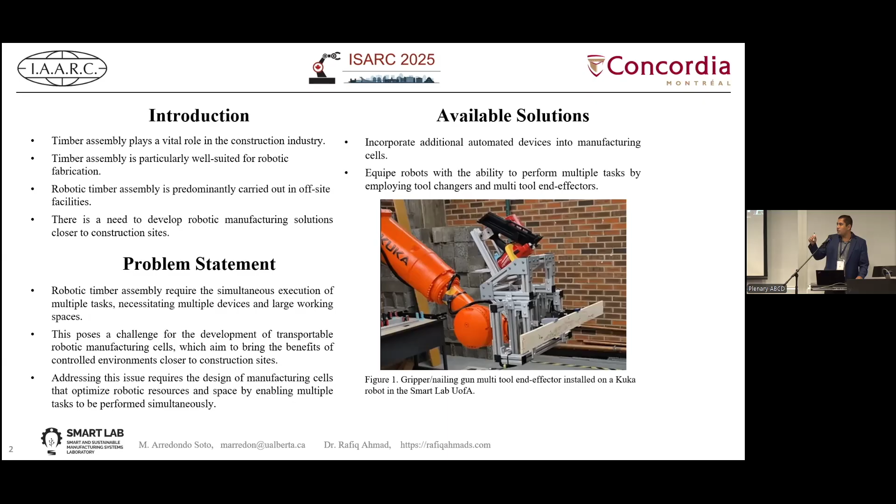Instead of using an external device, we want to make the robot able to hold and nail timber elements at the same time. So the concept of mobility-added multi-tool end-effector is introduced. This end-effector enables simultaneous execution of picking and nailing with the ability to modify nail position and orientation. It's designed using 1-degree-of-freedom closed-loop linkages driven by linear actuators, which may allow easy control integration and provide structural stability, characteristics of this type of linkage.

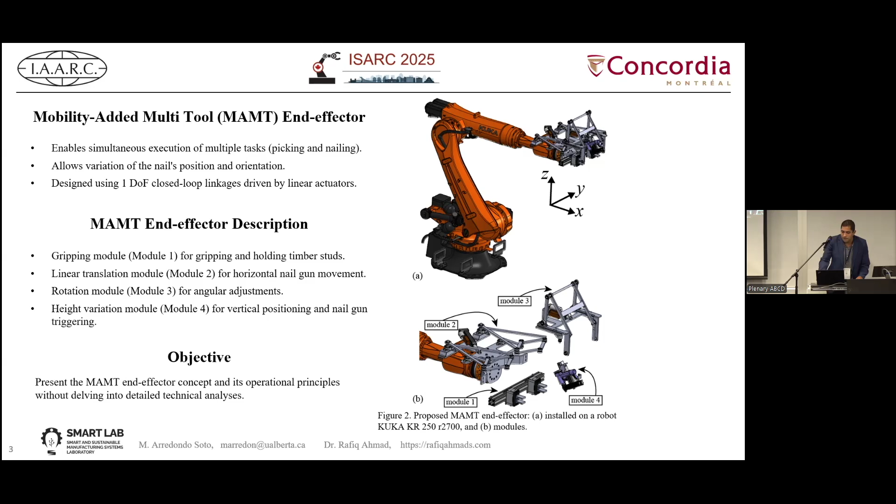The general structure is shown in Figure 2. It's composed of 4 main modules: gripping, linear translation, rotation, and height variation. The main objective of this work is to present the end-effector concept and its operational principles without delving into detailed technical analysis for now. So Module 1, gripping, is shown in Figure 3.

It is composed of 2 grippers symmetrically positioned along the end-effector's y-axis. This module allows the end-effector to pick and hold timber elements during the nailing process.

Module 2, linear translation, is shown in Figure 4. It utilizes a double Peaucellier planar mechanism. The Peaucellier mechanism is a classic straight-line generator with 1 degree of freedom. By connecting 2 Peaucellier mechanisms in parallel, as shown in Figure 4A, it not only generates a straight-line motion, but a straight-line rigid body translation, which allows moving the nail gun linearly parallel to the y-axis over the gripped timber element without on-the-side rotations.

The double mechanism design with the dimensions used in this work allows a linear displacement of 700 millimeters with an input-output ratio of 3:1, which means the nail gun can move 3 times the displacement of the input linear actuator.

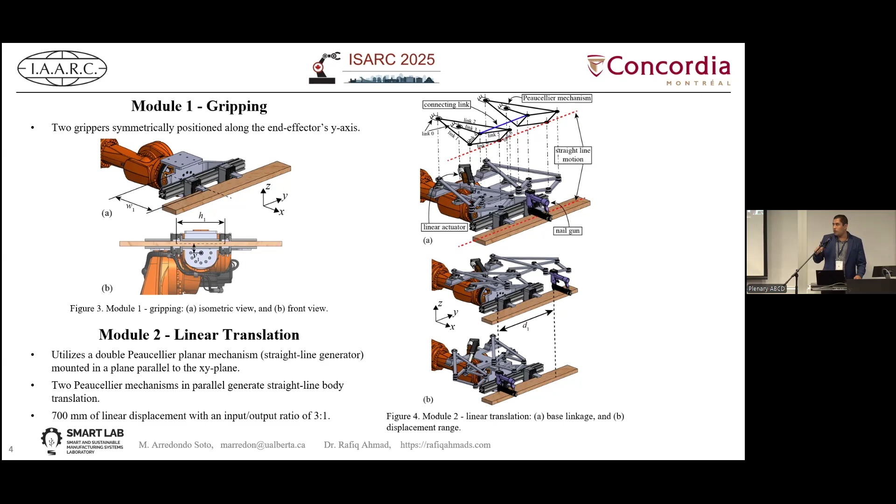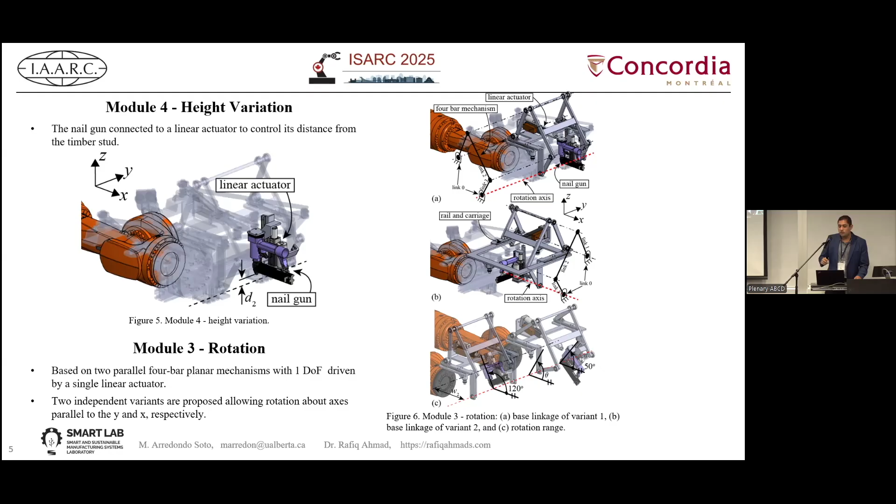Module 3, rotation, is shown in Figure 6. It is based on 2 parallel four-bar planar mechanisms, the classic ones. The complete arrangement is 1 degree of freedom. In this mechanism, the nail gun is attached to link 3, and 2 independent variants are proposed: one to perform rotation about the y-axis, and one to perform rotation about the x-axis. Module 4, height variation, shown in Figure 5, consists of a nail gun and a linear actuator connected by a linear track. This module is used to modify the distance between the nail gun and the gripped timber elements.

Now let's see the application examples. This section provides visual demonstration of the end-effector functionality in a real timber nailing process. 2 robots equipped with the end-effectors were animated during the fabrication of 3 timber nail structures: straight on plane, rotate on plane, and rotate off plane.

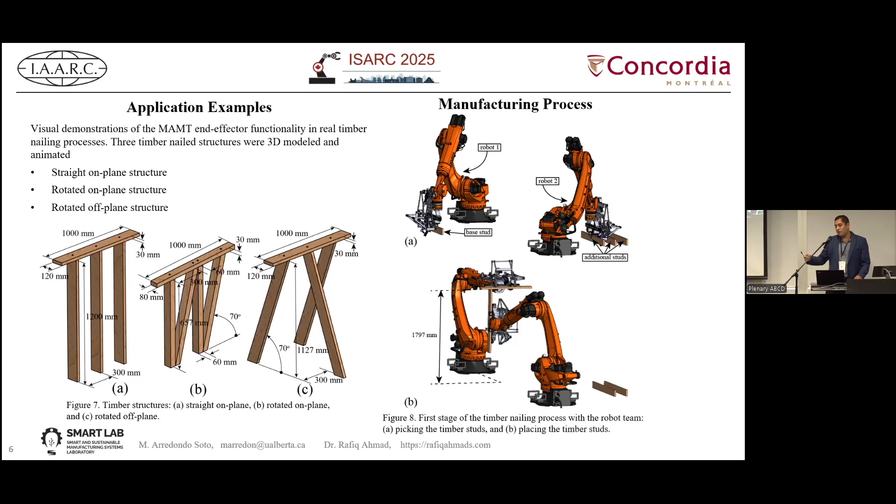Let's consider these 2 robots working alone with no other external device, just the robots, with the objective to manufacture these 3 timber nail structures. The manufacturing process consists of one robot picking, holding, and nailing the timber elements, while the other robot is just providing additional studs during the process.

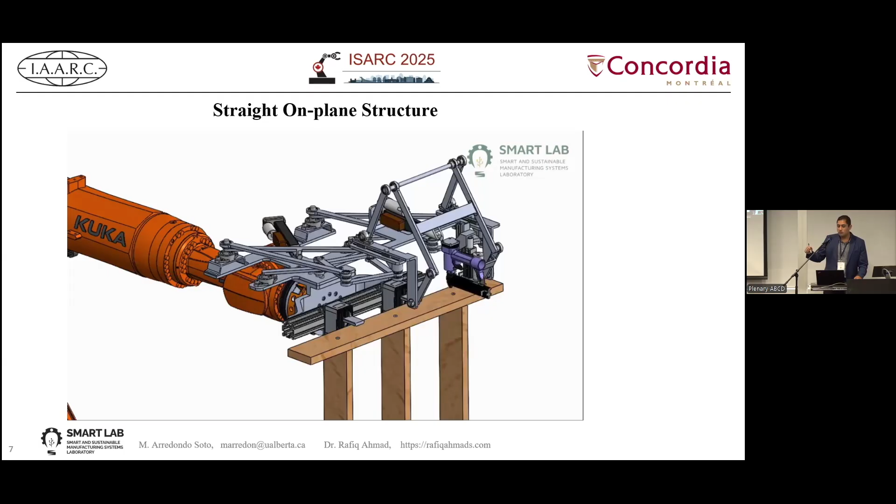Let's see the animations. First, straight on plane. Module 1 is holding the timber element, and Module 2 is moving the nail gun to the next position. Module 4 is approaching the nail gun to the timber element to perform the nailing process.

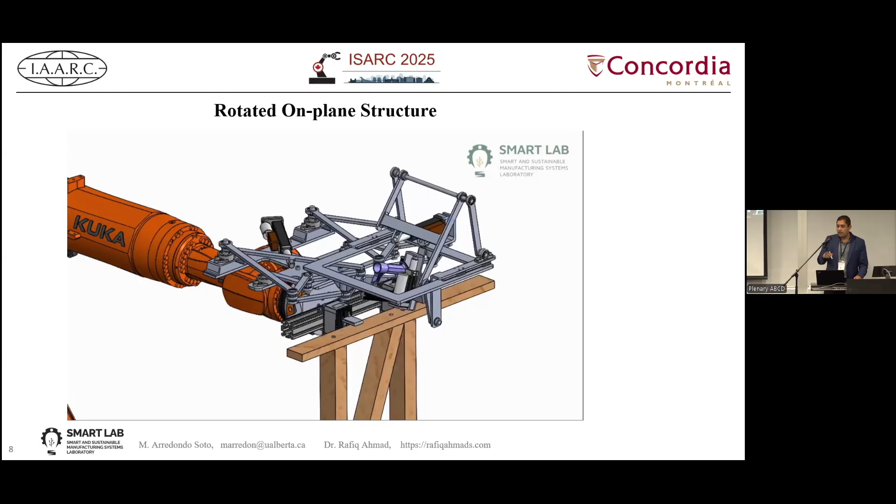Next is rotate on plane. Again, Module 1 is holding the timber element, and Module 2 is moving the nail gun to the next position. But this time, Module 3 is rotating the nail gun to align the nails with the timber elements below.

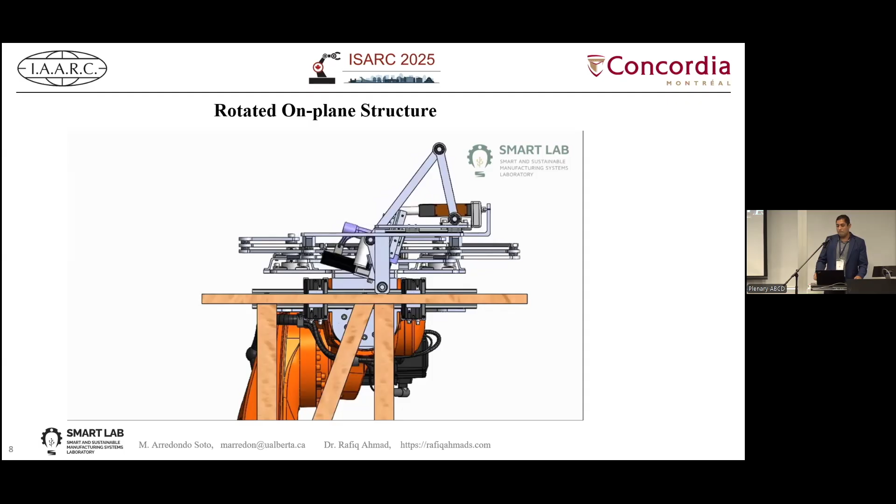Finally, we have rotate off plane. This is very similar to the previous one, with the difference that now we are using the other variant of Module 3 to perform rotations off plane, but again, to align the nails with the timber elements below.

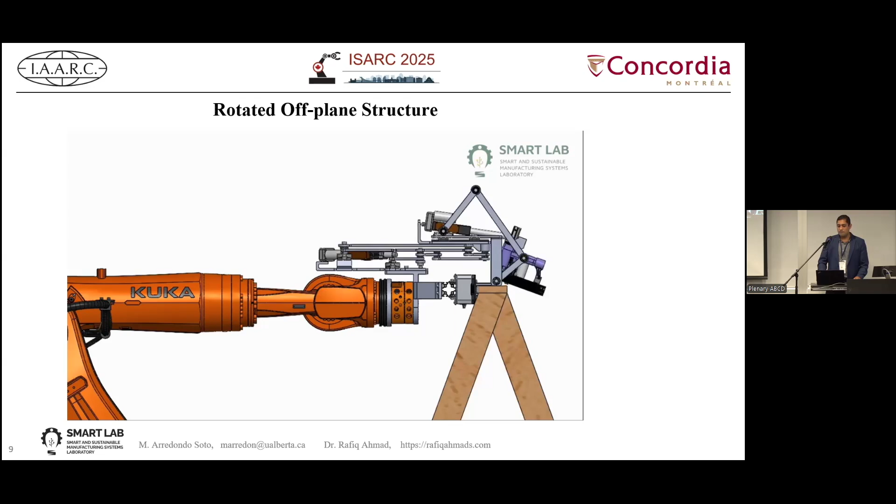To summarize this work, the proposed end-effector has some advantages, such as optimization of space, time, and robotic resources. Also, due to its 1-degree-of-freedom mechanism design, it is easy to control and provides high force transmission and structural stability. Also, due to its modular design, it's flexible to adjust to different scenarios, and of course, it eliminates the need for other external devices.

On the other hand, there are also some limitations identified, such as questionable accuracy due to its custom-made nature, something that happens to all custom-made machines at the beginning. Also, the implementation can be complex due to the high number of parts and the need for technical validations, and of course the need to develop the control and the integration into the robotic process. Maybe the control won't be too difficult, but we need to do it because at the end of the day, we're adding motion, we're adding degrees of freedom to a robotic system.

As future work, we plan to optimize the end-effector motion, dimensions, and working space, do technical validations, manufacture and assembly implementation, and experimental tests.

To conclude, the concept of mobility-add multi-tool end-effector presented in this work goes beyond additional mobility and multi-tooling. It emphasizes equipping the end-effector with the necessary capabilities to perform tasks independently of the robot motion. This independence may significantly advance the automation of timber assembly, offering a compact, efficient, and versatile solution for robotic systems.